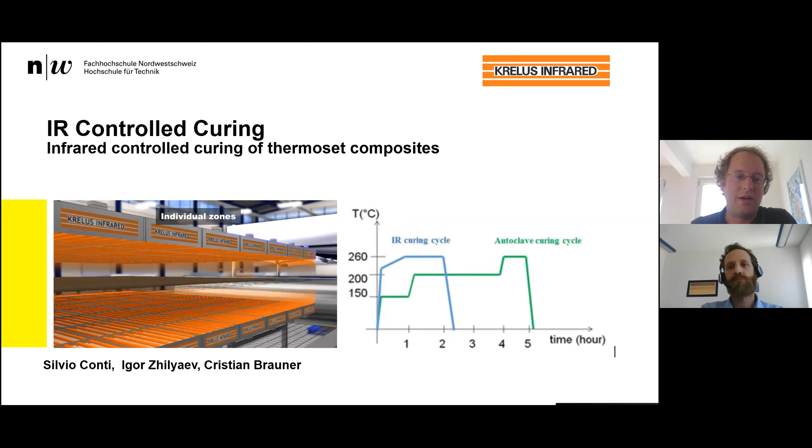Silvio and I would like to present a topic which comes out of an ongoing research project. In this project, we are using technology provided by the company Krelus, which Silvio represents—a small company he will introduce in the next slides. We are using infrared heaters, commonly used to heat thermoplastic materials and cure thermoset-based composites. Today we want to give you an overview of what we have done in the project, and show that this technology has high potential, performs very well, reduces process cycle time, and can also decrease costs.

So we have a small agenda. First, a short introduction, then we will present the concept and approach. Then we have some benchmark examples related to experimental trials, and also our approach where we use simulation to modify the process, and finally the summary.

First, we would like to introduce ourselves. My name is Christian Brauner. I'm working at the University of Applied Sciences in Northwestern Switzerland. You can see a nice image here—we are not located where the highest mountains are, it's close to the German border. We are a research institute with around 40 people doing applied research around polymer materials, starting from formulation, polymer processing, and design.

If you come from the German side, Fachhochschule, University of Applied Science, is not so common in research, but in Switzerland this is a little different because these institutes have a strong focus on applied research. That is all I would like to say about my institute.

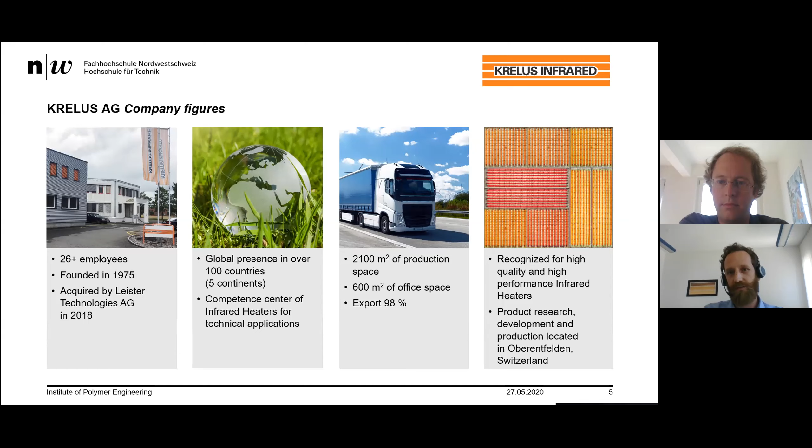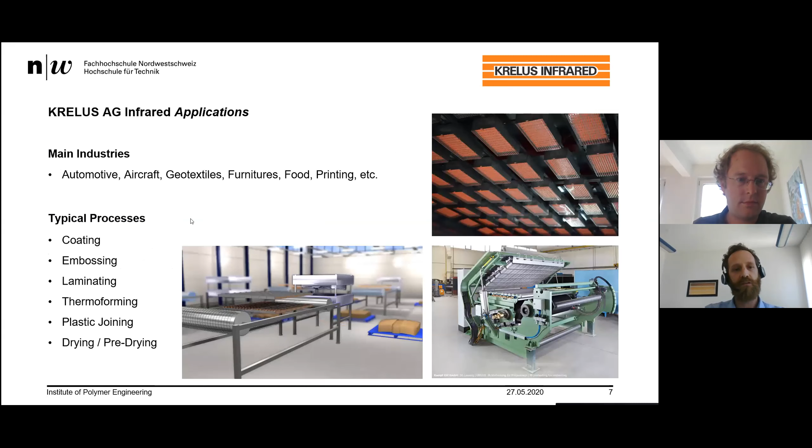So let's talk about some products. What products does Krelus AG manufacture? The core competence and the ambition of our company is to produce the best infrared heaters available on the market. Krelus does not build machines or plants and does not do automation. We concentrate on the heaters.

Every infrared heater which we made works according to the same operating principle. It is a medium wave metal foil heater. This metal foil is made to glow by a flowing current and works perfectly in oxygen atmosphere. It is therefore not coated with glass, for example, or ceramic.

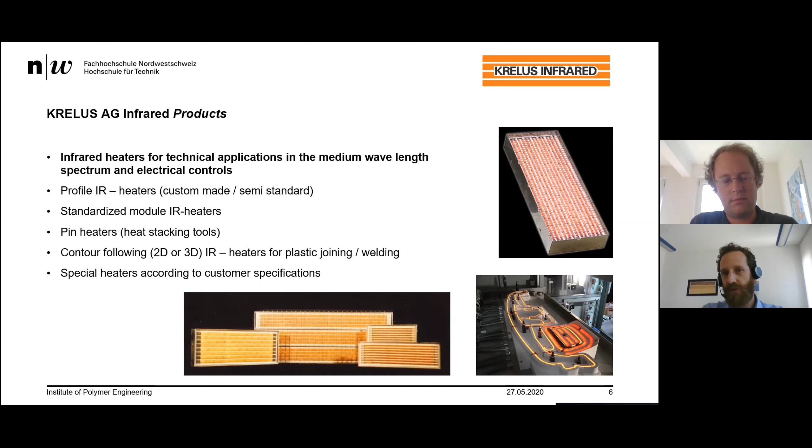We make, on one hand, profile heaters, custom made. Custom made means different sizes, different lengths. We can make them up to 7 meters in one length. If no zones are required, this is a good product, with the heating foil going through the whole length. But for some applications, maybe a machine user treats different sizes of products, maybe 5 meters, 7 meters, 2 meters. Therefore, the profile heater solution is not the best.

That's why we invented standardized smaller module IR heaters. You see a picture on the right side. We can build them together to bigger fields, also up to 7 meters or more. But the advantage is that we can switch off several heaters just to treat the material which is running through, or which is stationary positioned on the heater. We also make smaller heaters, pin heaters, heat staking tools for riveting applications, probably for riveting of door panels.

And of course, we are making also welding heaters for welding in 2-dimensional or 3-dimensional shape for plastic joining. Two parts are being heated up, contour followed, and put together. This technology of welding with contour-following metal foil heaters, or in combination with ultrasonic welding processes, was developed at that time by Krelus and the partner. And nowadays, this is the state of the art. And of course, we are making some special heaters according to customer needs. Which type of emitter and how they are combined ultimately depends on the process.

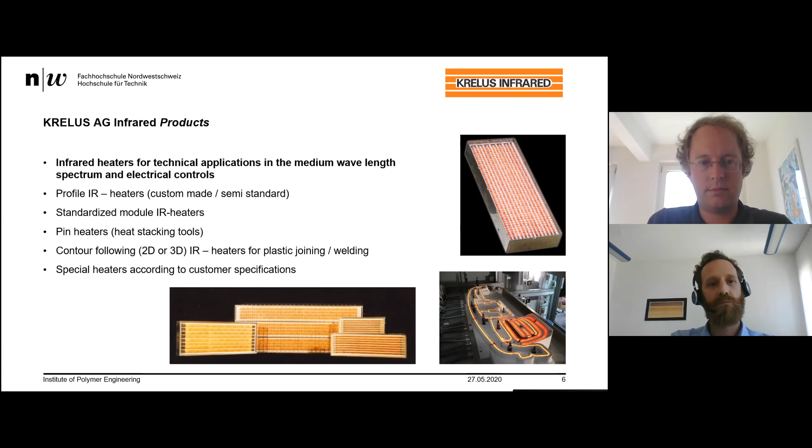Applications. The application range of Krelus heaters is enormously diverse. I've just written down a few of them. This has to do with the fact that the emitted radiation is simply optimal for many, many products, almost all plastics, paper, water. And infinitely variable control in real time is possible.

The operating principle is heating by means of radiant energy. So where the radiation hits, there it also heats. The use of heaters for the target heating of environments, or for heating, or as a heating source for an oven, is less suitable. There are more efficient solutions for such applications.

And the main industries we are in are automotive, of course, aircraft, geotextiles, furniture materials—not the wood, but the materials which have been used for making the furniture—food, packaging for food, printing, drying of ink, etc.

And typical processes in these industries is coating of different materials. As an example, the dip coating of a glass fiber mesh, curing of Teflon to make, for example, tents that cannot be burned.

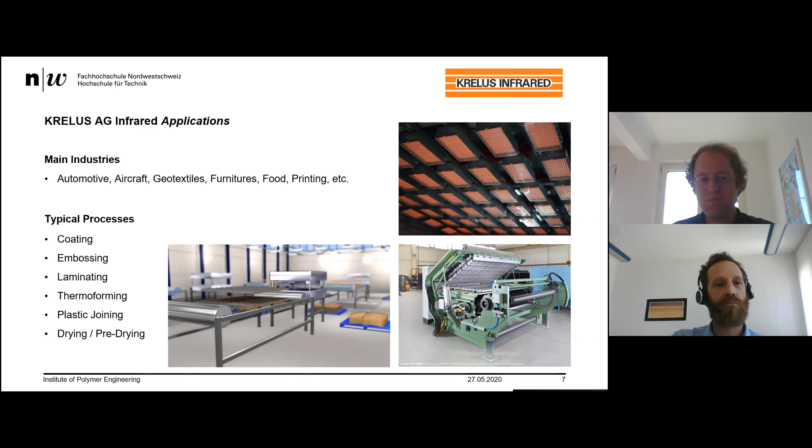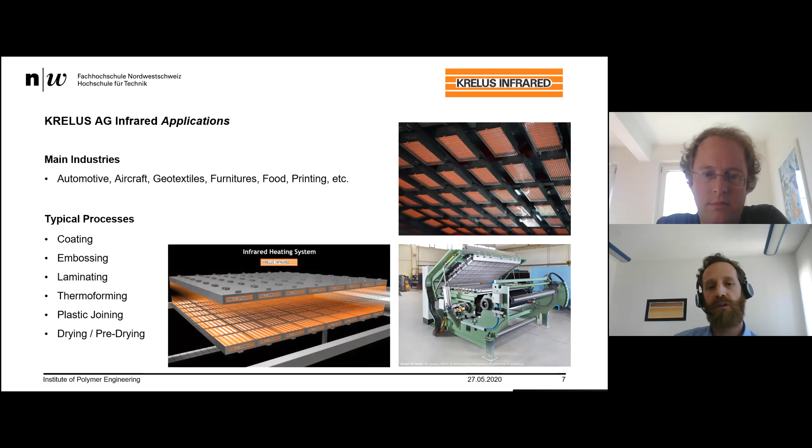I have here a short video that shows just a simple thermoforming application. A sheet is being moved into an upper and a lower heater. If the materials are thin, 1 millimeter or less, an upper heater, one-side heating, is sufficient. We heat until we reach the target temperature by measuring the surface of the product.

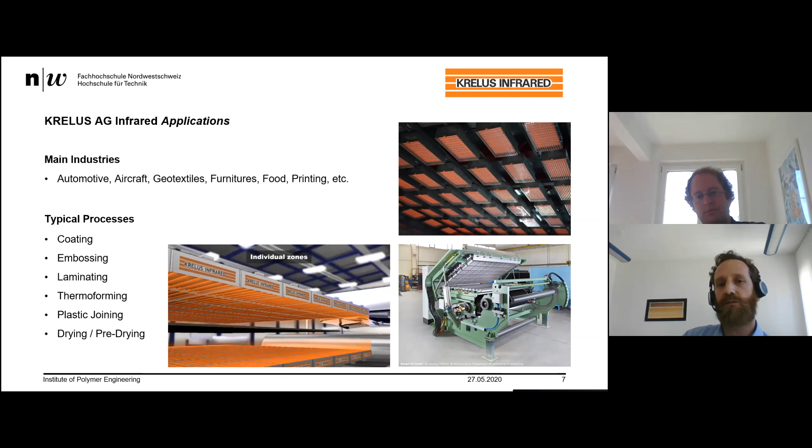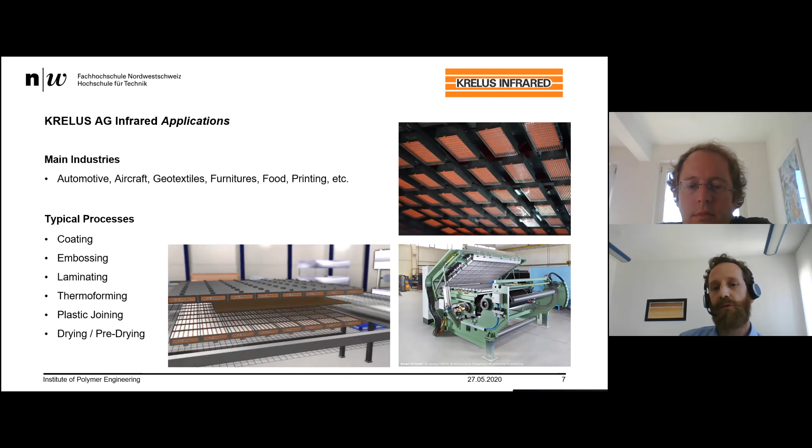And due to real-time controllability, the heater reacts to keep the temperature. Sometimes dwell time is needed to have a thorough-going temperature. And then it moved to a press.

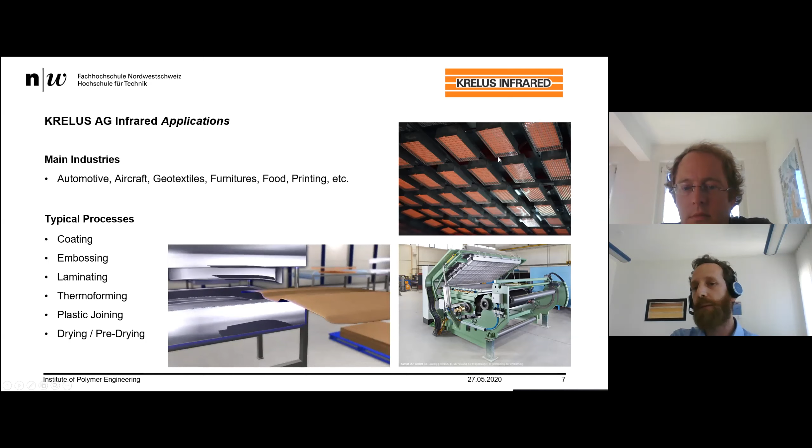On the upper side, you see this is a hot drape forming application for making bigger parts, flaps. Heating field size is maybe 2 meters by 20 meters.

So what are the properties of Krelus heaters? Highest energy efficiency. The heater is not covered with glass, simply no covers, just a protection grid to secure the heating foil. Approximately 90% of the radiation comes out and radiates directly to the product.

We are reaching on our foil 850 degrees. This corresponds to a wavelength of 2.5 micron. We do not emit only one wavelength, heat sources are always emitting areas. A laser doesn't - a laser will emit just one wavelength, but this is not the topic here.

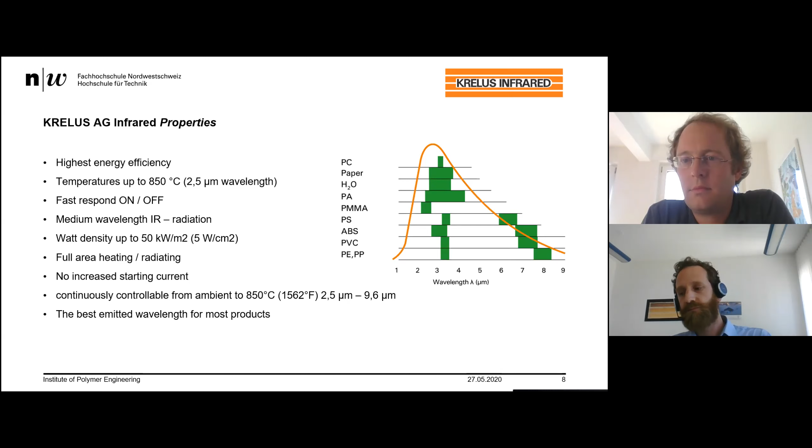I will show you, I think, 2 important main advantages compared to other heaters, like glass heaters or ceramic heaters.

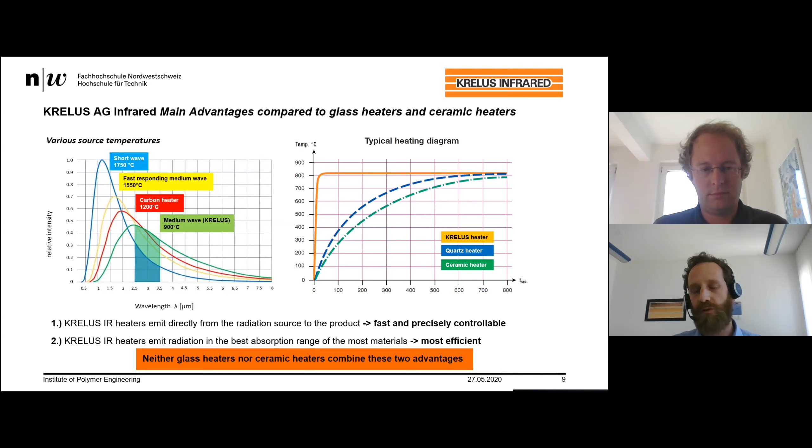The quartz heater or ceramic heater emits energy almost in the same wavelength as the metal foil heater, but they cannot be controlled really fast. The shortwave heaters can be controlled really fast, but mostly don't have the right wavelength for plastics, paper, water. So neither glass nor ceramic heaters combine these two advantages. I think these are the two most important points of a metal foil heater compared to glass and ceramic heaters.

So what is needed for an optimal infrared solution? Infrared product know-how is needed. Infrared heaters should be known, physical properties should be known, the suitability of the heaters to a process, some calculations of a process if possible, and of course a lot of experience to find the right product.

Customer and partner know-how is a second point, which is really important. A lot of them have experience with infrared solutions because they are using machines with infrared, so they can give really nice advice on how it should be.

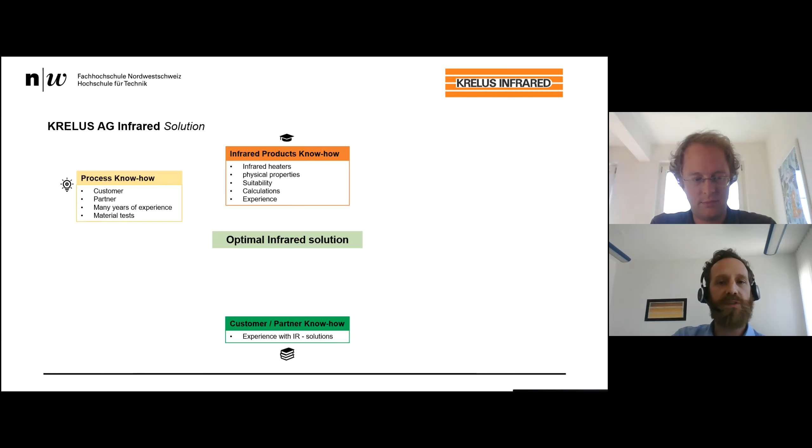This is quite important, process know-how is needed. This is also mostly in the hands of customers and partners. Some processes we also know because of many years of experience. And to process know-how, material tests also belong.

Then the material should be known, which has to be treated. Mostly also the customer and partners have this knowledge, also as for the process know-how, experience and material tests.

And then, of course, every heater needs an electrical control. We have some know-how of that. Customers know how they control the heaters. And important are interfaces between heaters, electrical control, and machines.

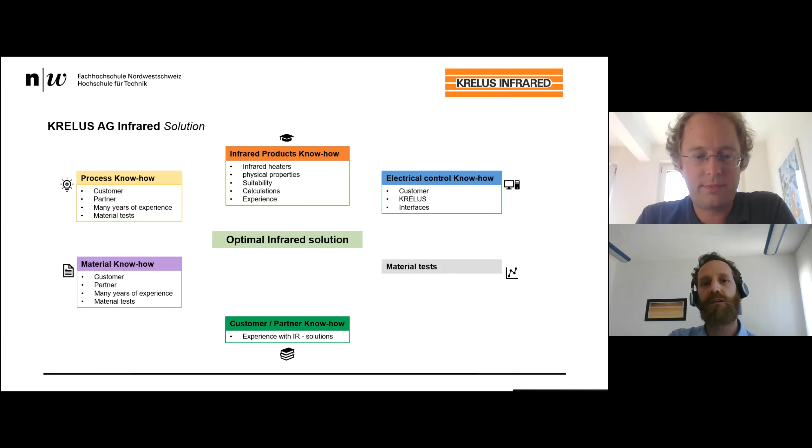And material tests, last but not least. Some processes are quite difficult or they are new. We have to do first some tests with the materials because calculations alone are somehow quite hard. We see it afterwards.

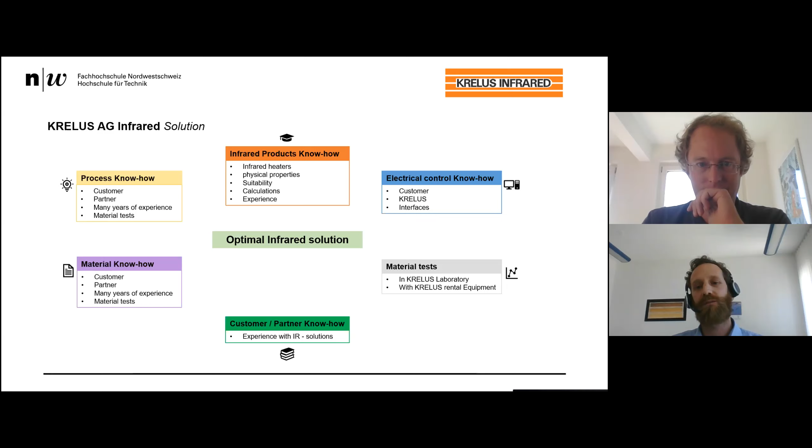Material tests, we can make some material tests in our laboratory, or we use a lot of rental equipment which we give to the customer to make some tests.

So all of these 6 points are a bit combined together. For some solutions it may only need 1 or 2, for some it needs 4. But this just shows that it's not so easy to just open a catalog, look at the heater, and say, oh, I like this one. It's a bit more complicated.

So this was my last slide. I think I should give you an overview of this nice product, and we'll pass now to Christian. Yeah, so thank you, Silvio.

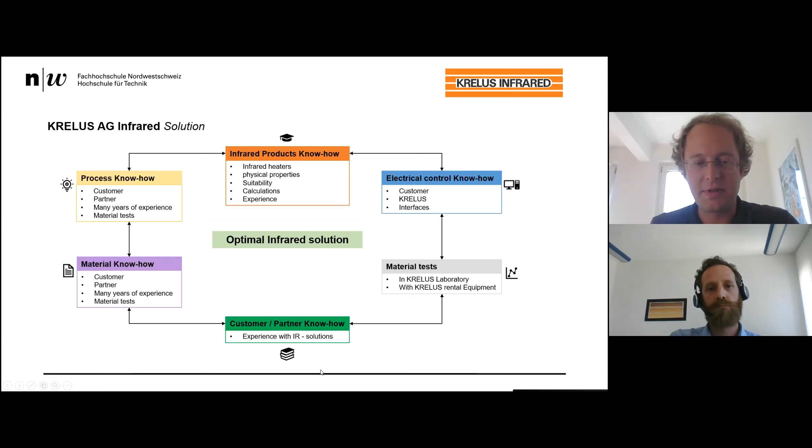So what Silvio has introduced is that we have a heater which has really nice properties, can heat up really fast, and in addition we are able to customize the heaters and build heat fields with separate elements which we can apply for advanced control. And this was the starting point. So normally,

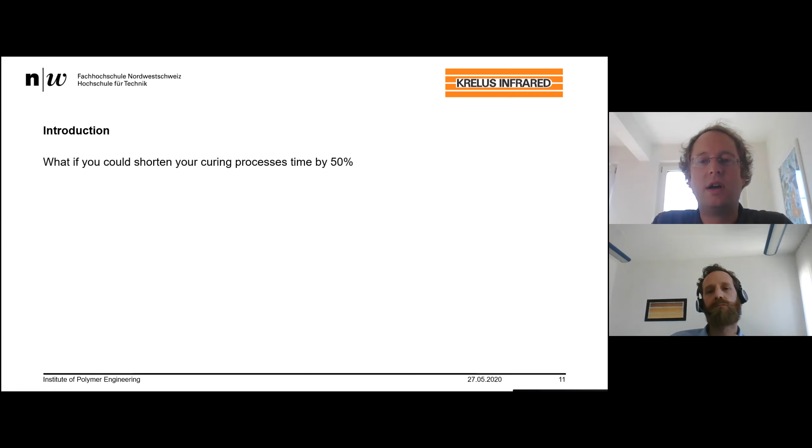KRELUS systems are mostly used in the composite industry for heating up thermoplastic materials or organosheets and so on. And our idea and approach was, what is happening if we apply this technology not to heat up a thermoplastic material? What will happen if we use the technology to control the curing process?

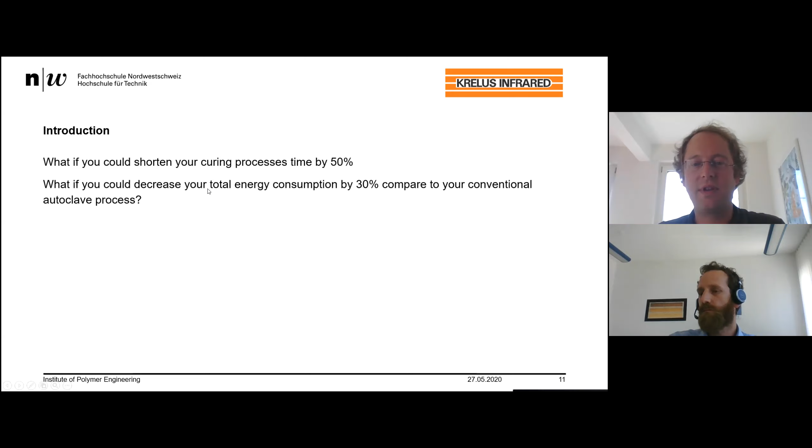And so we set ourselves some goals. Can we shorten the curing process? Because if we apply such a system, we are dramatically reducing the thermal mass which we have to heat. So if you think about the huge autoclave, you're heating up tons of materials, the mold, the autoclave itself, the air inside, or the nitrogen gas. And so here we have a system which directly applies the heat into the composite material. So therefore, can we shorten the curing process itself? Can we reduce the energy? And at the same time, can we reduce costs?

So it looks like this. And so our approach was, on one side, to build up an experimental field where we have a kind of heat field with advanced control capabilities. So here you can see our heat field schematic, which consists of 4 multiplied by 7, so in total 28 emitters.

Each emitter has around 540 watts, with a total power of 15 kilowatts. And as said, we have a PLC-based control to adapt the power of each heater in the heat field. Therefore we are able to modify this power distribution related to complex geometries, with the target to achieve a homogeneous temperature on the part itself.

And in this experimental setup, we are using a lot of sensor systems as well. So in this case, a cure monitoring system from the company Synthesis, which I will show later on.

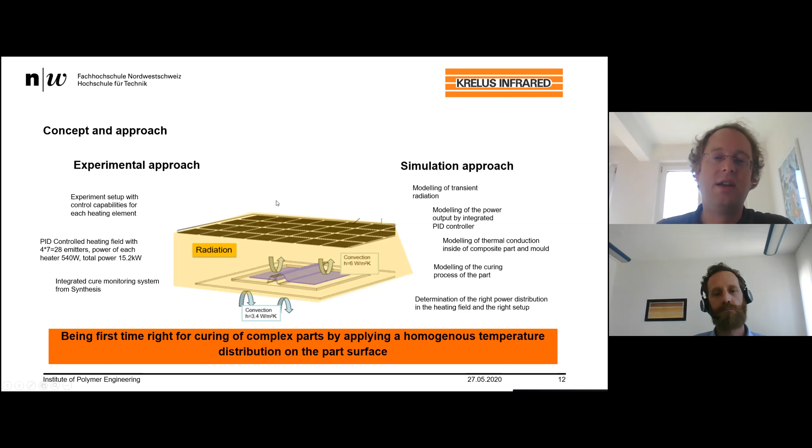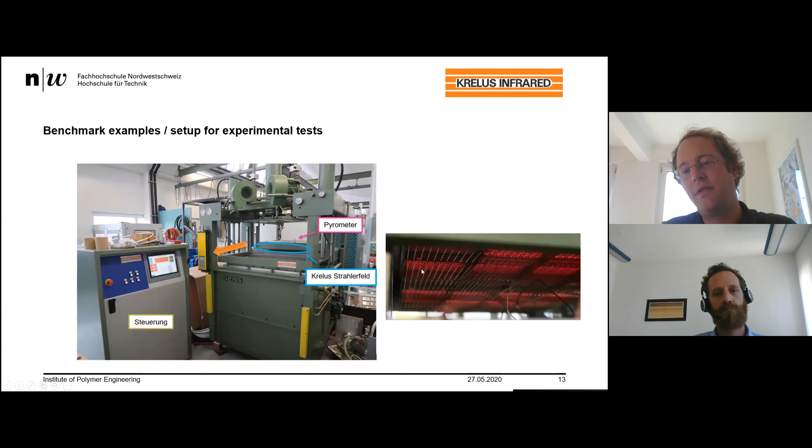And later on, I will go a little bit deeper into the simulation to show you some animations. So here you can see our setup. So initially, this was a thermoforming machine. And we used the machine differently, as I said, for thermoset materials. And here you can see the heat field with some heaters which have different power distribution.

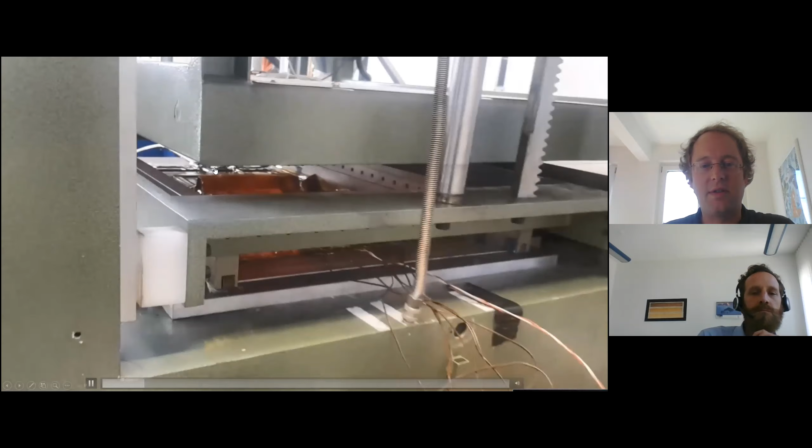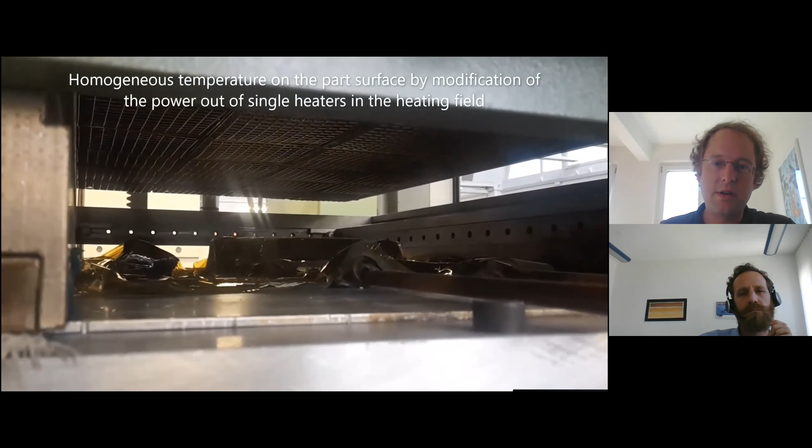So we have a small animation here so that you can see a little bit the process itself. So we have a kind of vacuum setup of this omega-shaped part inside. And we have an open oven, so it's not closed, because we need a certain amount of convection. And the system is controlled, so there's one pyrometer sensor in the heat field which measures the part temperature.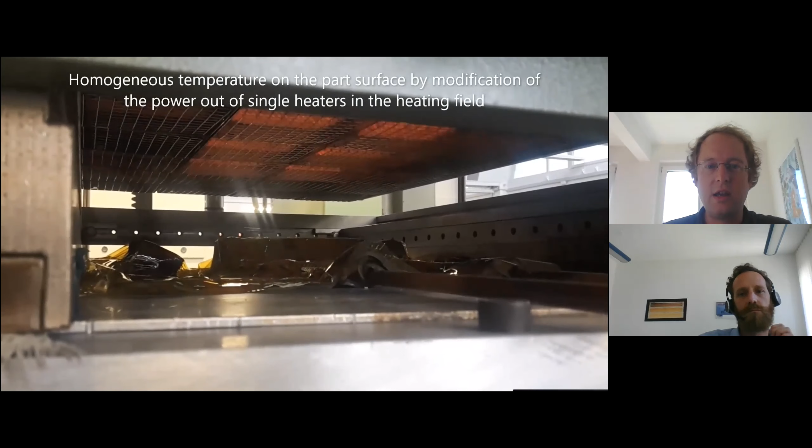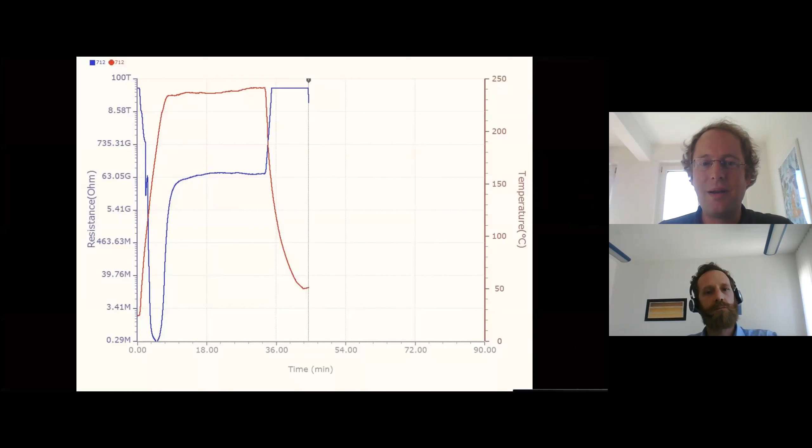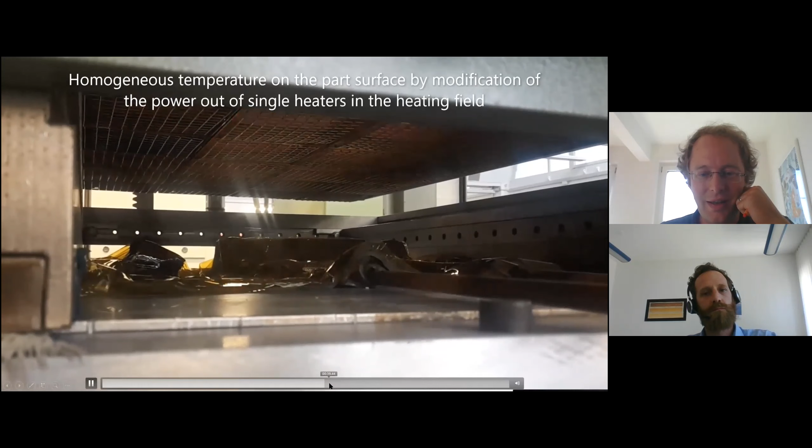And then there's the control system, and here you can see a little bit the properties of the control — it's not well tuned here, but it's really nice because you can see that the emitters are flashing a little bit, so it looks like a small disco. Beside this, we can measure all parameters, and we can modify, for instance, the control parameters.

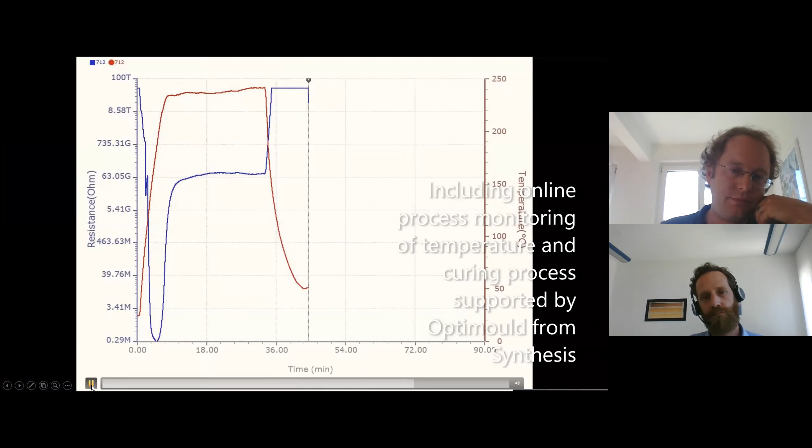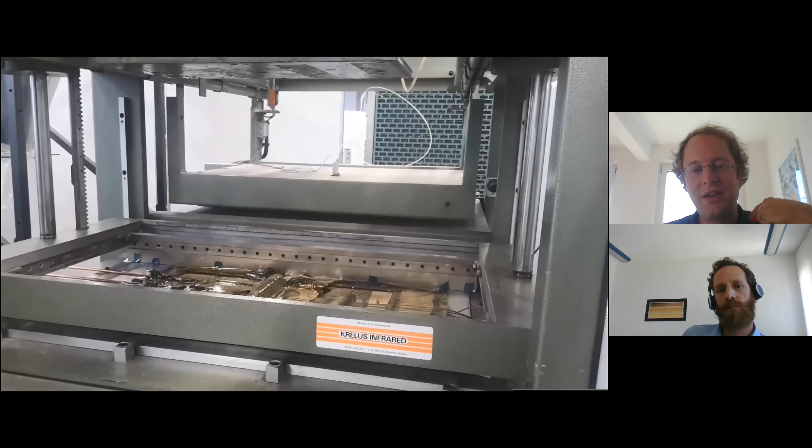And this is an example of our cure monitoring, I will go into this later on. And we can also apply additional cooling here. So you can see there's convection cooling from the top, some ventilators which can cool the part really fast.

So now I would like to show you 3 examples. The first one is related to an aerospace application, which was already visible in the video, but I will go into detail a little bit.

Then we applied one application which is more related to the automotive industry. So we applied an infusion process with a really reactive resin system, which is normally used in high pressure RTM, a system which reacts in 2 minutes.

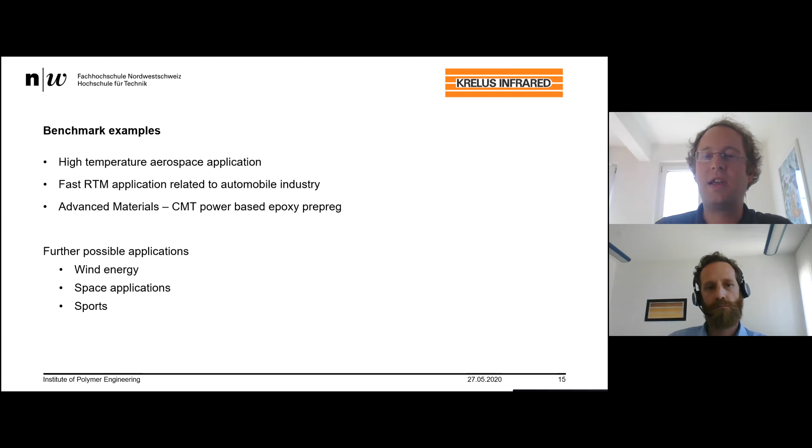And then I want to show you one additional trial which we have done with the company CMT. It's a provider for powder-based epoxy prepreg systems, and there we applied an advanced control, a nice demonstration of what is possible to follow a complex curing profile.

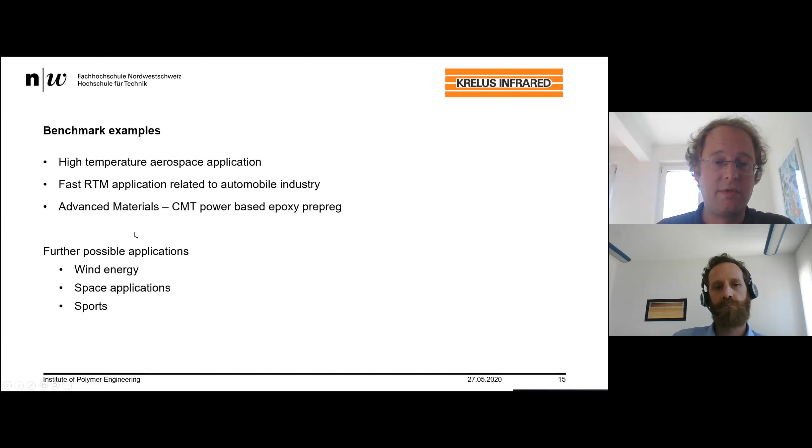And further possible applications, of course, are wind energy, space, sports and so on.

So coming to the first example, this you have already seen in the video itself. There we are curing these omega stiffeners, which is somehow related to aerospace application. For instance, if you have the stiffening elements in the A350 Airbus airplane, there you find such omega stiffeners, which are applied in the fuselage.

And the material which we are using here is not a common material. It's not an epoxy-based carbon fiber prepreg. It's a cyanate ester-based prepreg. So it's a high-level thermoset material with a glass transition up to 400 degrees.

Normally used up to operation temperatures nearly to 300 degrees, for instance for a turbine or so on. And this material normally has to be cured around 260 degrees.

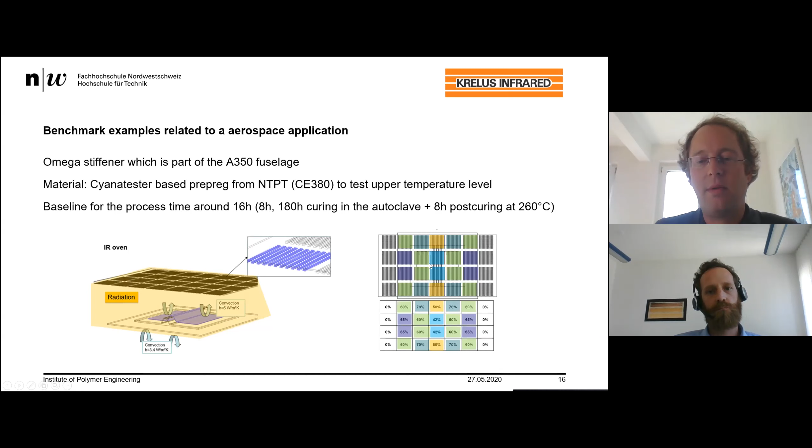And below you can see the curing process. The strong advantage is that we can apply heat rates up to nearly 40 degrees per minute. If you compare this to your autoclave, you're around 1 or 2 degrees per minute. So it's accelerating really fast.

And so we're able to reduce the process time from 16 hours to nearly 1 hour, or you can see the curing process is nearly over after 30 minutes. So in our newest trials, we applied just 30 minutes.

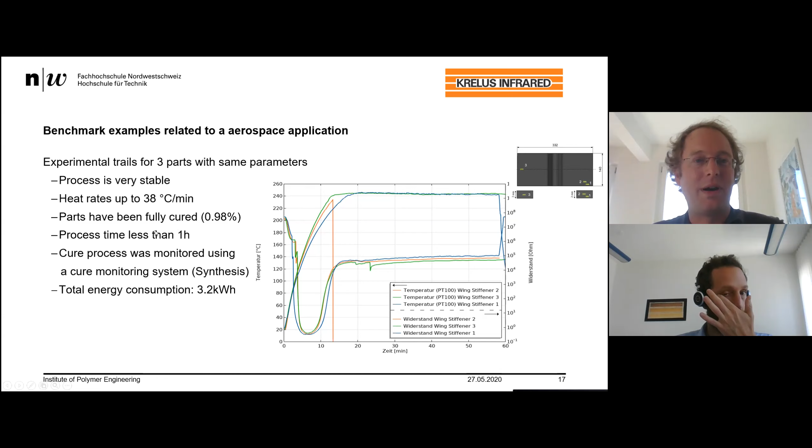And at the same time, we have a total energy consumption of 3.2 kilowatt hours. If you multiply this by the cost of 1 kilowatt hour, which is around 30 cents, you know how much energy you have applied to cure this part. So in comparison to an autoclave, you can imagine, or later I will come back to this issue.

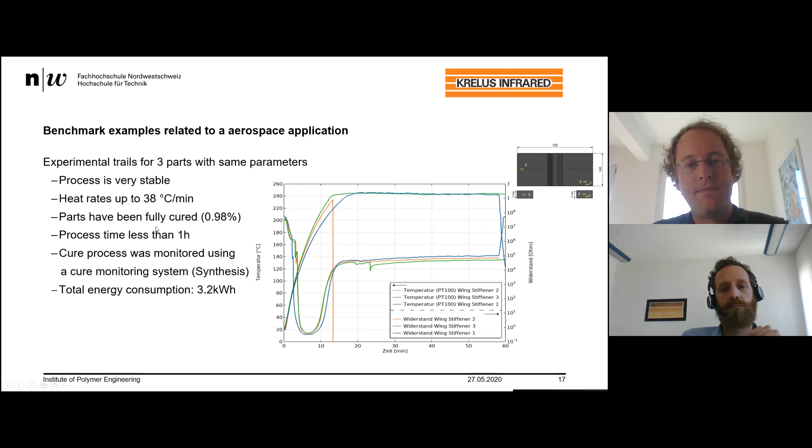We went up to the curing temperature really fast, and this resin system reacts then into, it needs 2 minutes to react. And we applied it to a more complex, or not complex structure, so we are a little bit limited in the size of the heating field.

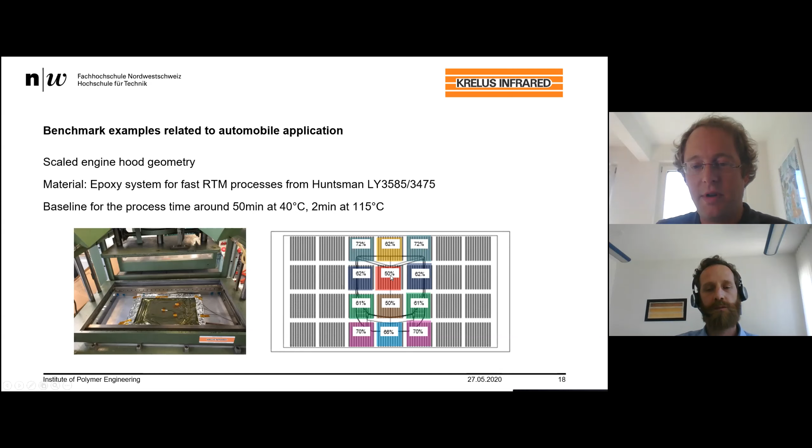So therefore we scaled a kind of engine hood down to fit into our test case. And you can see again the distribution in the heat field, which was derived by the simulation. And here I am presenting again three different trials. And you can see we varied a little bit with the infusion temperature. The infusion was really fast and stable, taking around 5 minutes. And then we went up to the curing temperature, and the system reacted really fast.

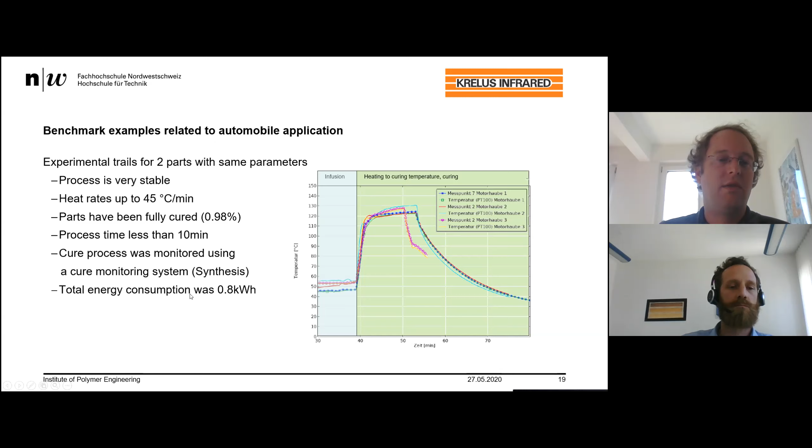So, and we were again able to heat up above 40 degrees per minute. We performed some measurements to check the degree of cure. And here, because we are not going with the temperature as high, we have a really reduced energy consumption as well.

The third test we performed was related to a really special material, which comes from Swiss Composite materials, so from Marcel Schubinger, which is also in the participant list. So it's a really nice material because it's a solid state epoxy-based prepreg. So it's not a liquid prepreg system, which you might know.

So the polymer is kind of powder inside of the prepreg, so you can store it infinity long times without any freezing conditions. So it's a nice material, and Marcel is able to answer questions later on, I think, or we can give

You the contact direct. And in this case, we used again this geometry, and we followed the curing process, which is shown here. So it's also possible to apply a heat rate or this advanced temperature conditions. And so

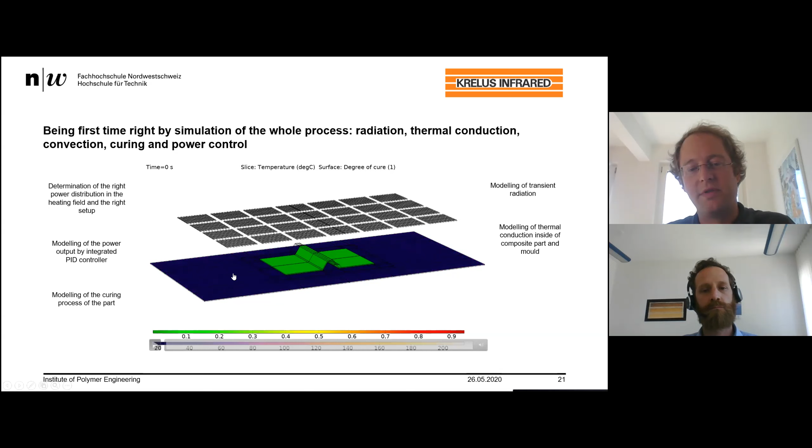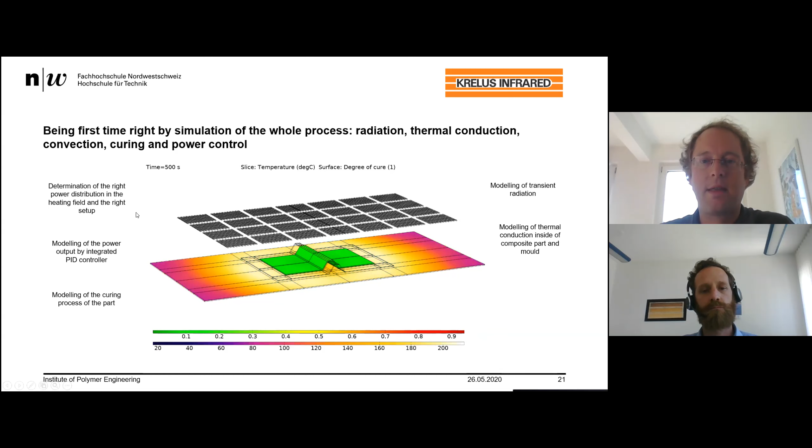And we added the curing process. So in this animation, you can see the temperature and also the curing of the part itself. And now I want to go a little bit in, or to give you a little bit more inside view.

So on the lower side, a cooling is applied. And so this enables you to react on the process itself. So these resin system which we use in this part is really special and has a huge exothermal energy if you cure this in the autoclave. So this process is not able in a convection oven,

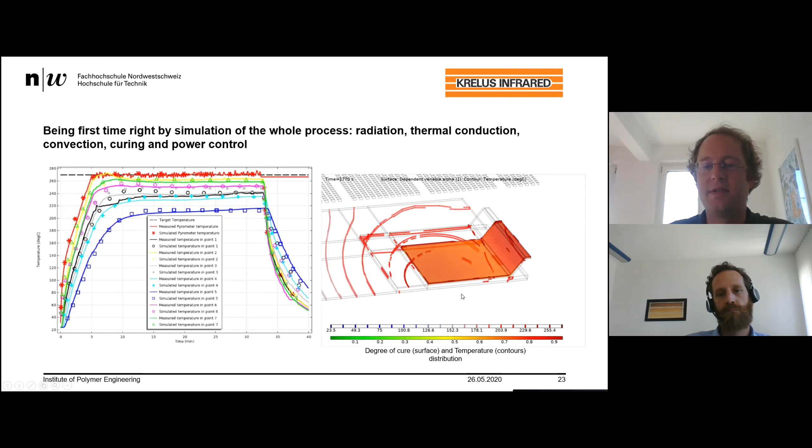So this is again kind of animation showing temperature contours and degree of cure, and you can see that the part cures homogeneously. The upper part is a little bit faster than this region, but related to the different distribution of the heating elements, this is, I think, a good solution.

And then, as I said before, we also calculate the curing reaction from the temperature, and we are modeling as well the exothermal heat flow.

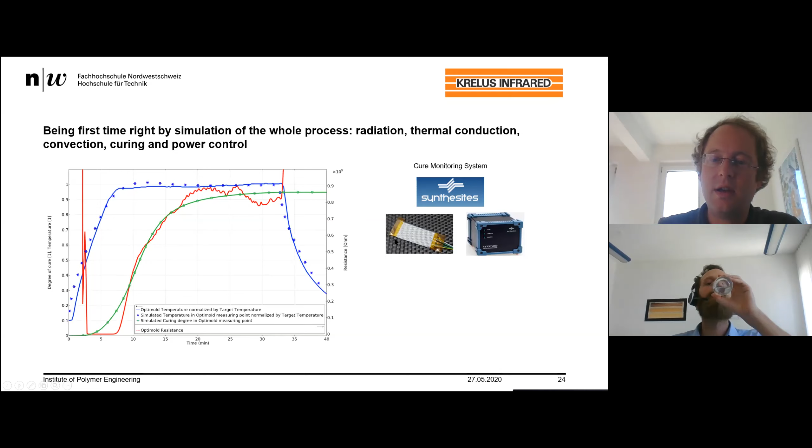Because we have used the cure monitoring system in the trials, we can also compare this to our simulation results. So what we are doing here is using a system from the company Synthesites, which measures the change of dielectric properties in the thermoset material. The resin behaves like a dielectric material, a really bad dielectric material, and you can see changes of the resistance during the curing process, because the mobility of dipoles and ions starts to decrease, and therefore the resistance increases. So the red line represents this change in resistance, and the green one is the simulated degree of cure.

There's a kind of scattering in the cure monitoring result, because we are using the sensors in a temperature range which is not commonly used. Normally the system is applied around 180 degrees, and I think we used it for the first time for temperatures above 220 degrees. That's why in this region we have a kind of scattering of the measurement signal.

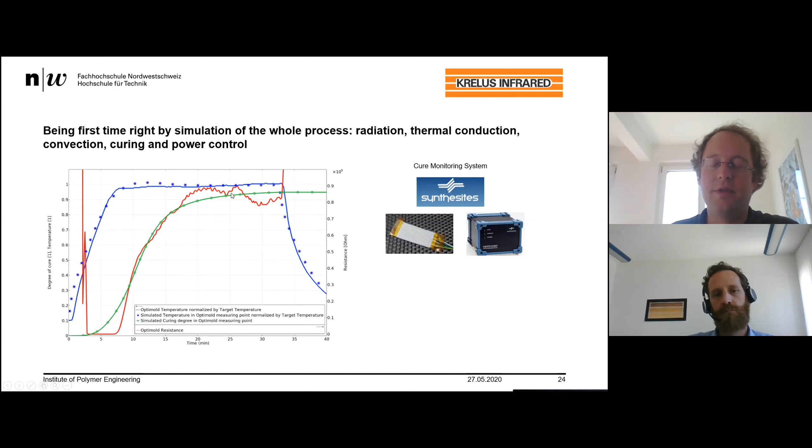Okay, now I would like to go into a little more detail. So as I said, we have this complex setup, and we can play around. One design factor is the glass fiber insulating material, which is below our mold.

Here you can see the result of a parametric study we performed. We changed the thermal conductivity a little bit, and related to this, we can modify the process. For instance, the blue curve shows that there's nearly no heat flow through the thickness direction, and then we get a huge exothermal reaction, overheating the part. The temperature increases up to 330 degrees, so not a really good process design.

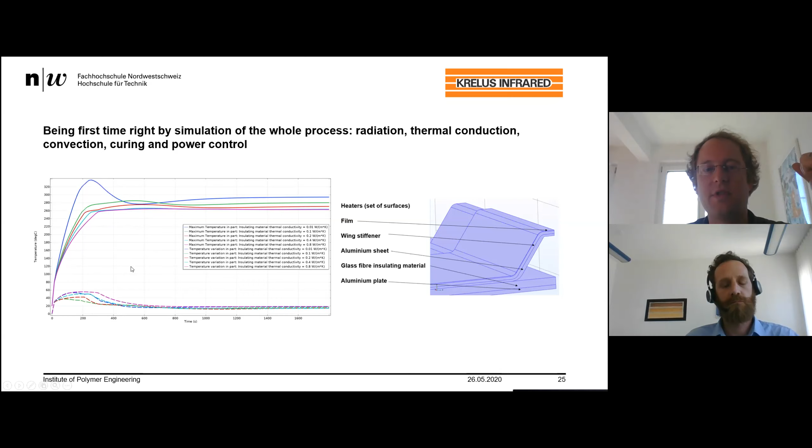But if we tune this a little bit, we can create heat flow through the thickness, and then, together with the applied control of the system, we can reach a nicely smooth heat rate up to the shown 40 degrees per minute.

So this was my part about the simulation. Now I want to make a short review about cost and energy issues. If we look at a small size autoclave, and apply again the process condition for the cyanate ester based prepreg - I know it's a really special material because we have to go to these high temperatures - we can derive some conclusions. In this case we have this autoclave with its total power.

Again, we have to apply curing for about 8 hours, and then do a post-curing in a convection oven. If we summarize this, we can derive that we need a total energy of 154 kilowatt hours. This means energy costs are around 46 euros and a process time of 16 hours.

And if we compare this now to the infrared controlled curing process, we can reduce the time. The heating is dependent on the part geometry, so we don't have to heat up a large oven. We can tune the heat field, and you can see here there are some heaters which we don't use because our part is not large in this case. So we can go down with the total energy and the process time.

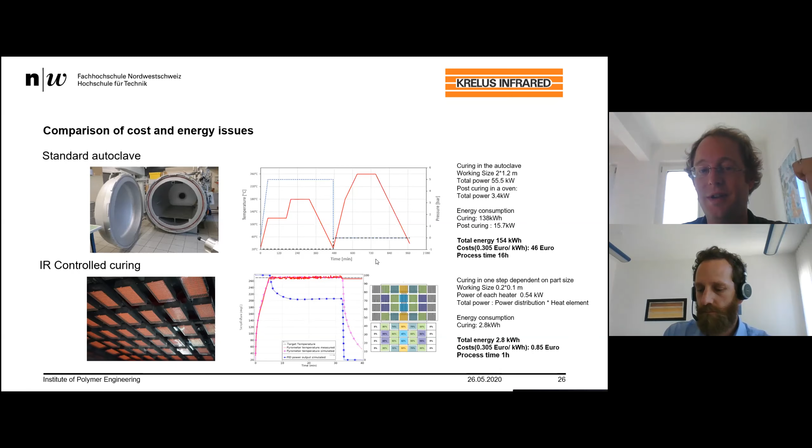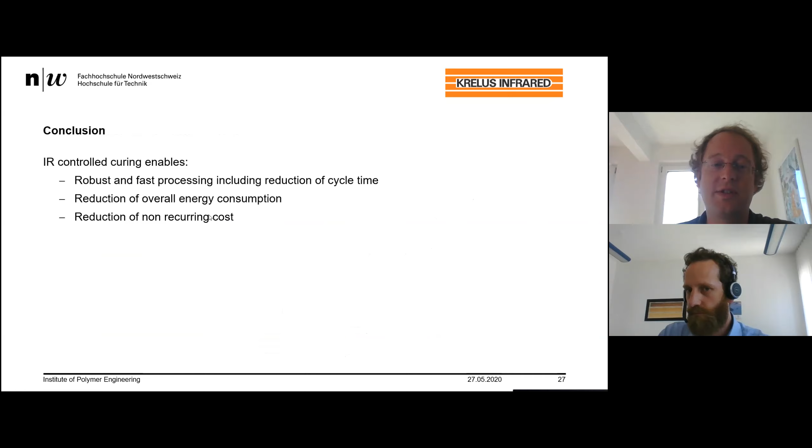So now, to summarize everything: we have a new process capability, infrared controlled curing. It's robust and fast, which I have shown with these experimental trials, and we can reduce energy consumption and therefore also costs.

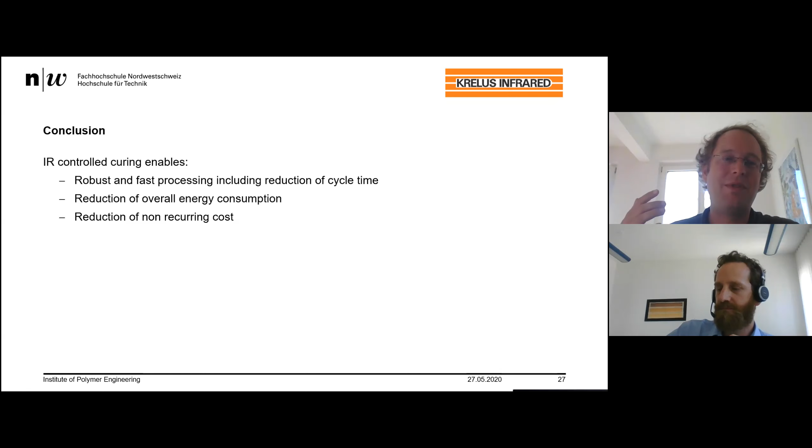But it's always a kind of comparison, so please don't judge me too hard. This is an example, and maybe for your case it will be absolutely different.